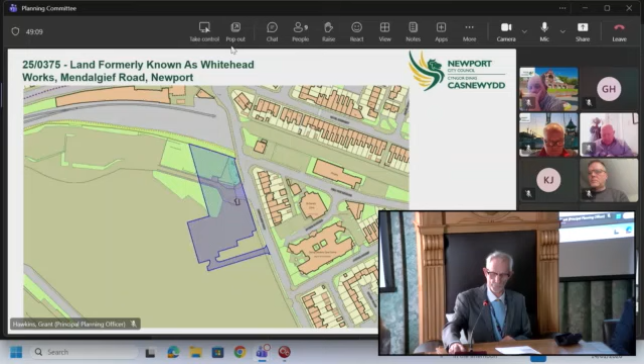On to the agenda. Now before us, application number 25/0375. The site is the land formerly known as Whitehead Works, Mendalgief Road in Newport. The presenting officer for this will be Grant Hawkins, the Principal Planning Officer. We also have no public speakers. Thank you, Grant. Thank you, Chair.

This planning application seeks permission for a 66-bedroom care home, use class C2, including access arrangements, parking, landscaping and ancillary buildings on land formerly known as the Whitehead Works, Mendalgief Road in the Pillgwenlly ward. The proposal is reported to Planning Committee as major development with a floor space exceeding 1,000 square metres.

The applicant has completed the statutory pre-application consultation process. The LPA has undertaken full public consultation through neighbour notification letter, site and press notices, and this has resulted in one objection. An EIA screening has been undertaken, which concluded the development is not EIA development. The recommendation to members is that the application is granted with conditions.

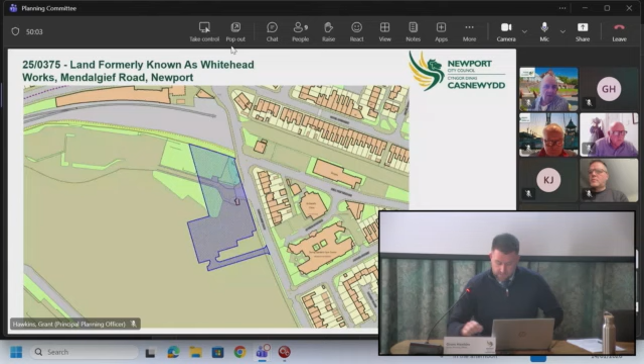The site forms part of the north-east corner of the former Whitehead Works, which is over 17 hectares in size. It is bound by landscape features to the north, adjoins Mendalgief Road to the east, Walker Point Way to the south, and residential properties to the west.

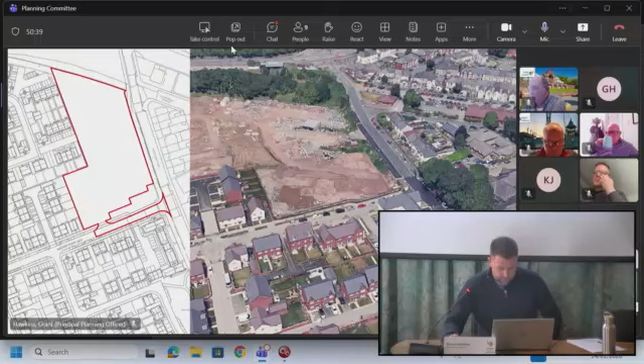The site is set down from Mendalgief Road and is generally flat and level. The immediate context is predominantly residential, although the site is within close proximity to a mix of other uses, including Belle Vue Park and the Royal Gwent Hospital. The site is located within the urban boundary and is partially located within Flood Zone 2 and 3C, as defined in the flood maps for planning Wales.

The former industrial site is allocated for housing under Policy H1 of the Local Development Plan. An outline planning permission was granted in 2018 for a mixed-use development of up to 529 residential units and 24 assisted living units, with a variation of that permission approved in 2020. Reserved matters approval have since been granted for the full residential element, comprising a mix of houses and flats, and the development is now largely complete.

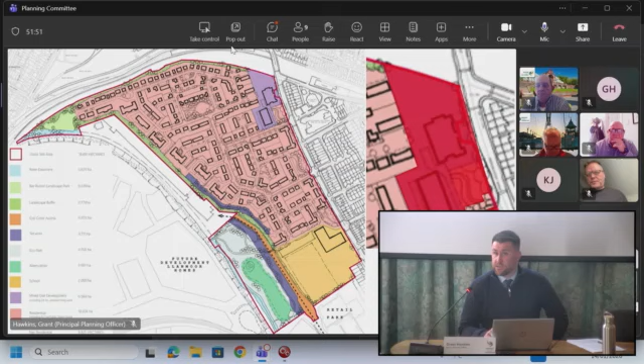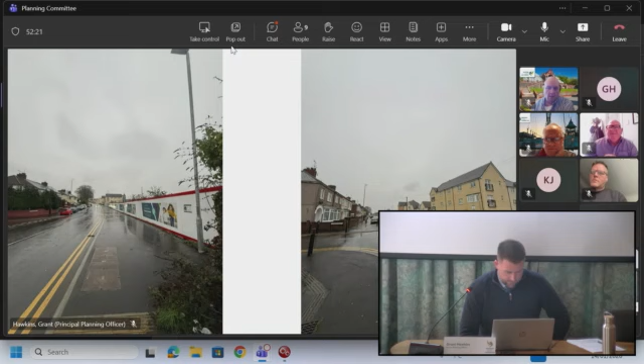The first photograph on the left is taken south of the development site and is useful to provide the context of the local area and how buildings of a taller scale along Mendalgief Road already exist. The flatted buildings are of a comparable height to the care home building that is being proposed. The second photograph again shows the relationship between the three-storey flatted building and Mendalgief Road, with the application site and Royal Gwent Hospital to the north in the background.

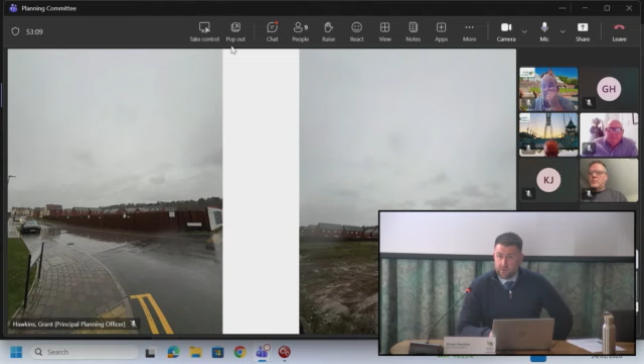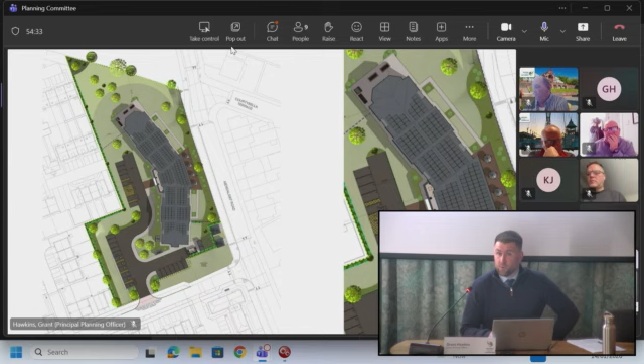As the site is located within the urban boundary and proposes reuse of previously developed land in a sustainable location, and the proposed use is considered appropriate within the surrounding context, the principle of development is considered acceptable, subject to all other material planning considerations being suitably addressed.

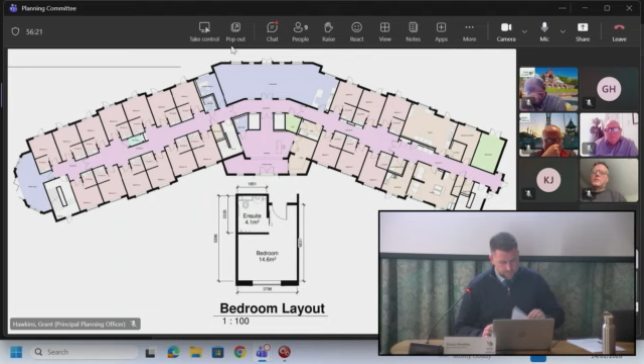The overall layout of the building, bedroom design, access to communal facilities and external amenity areas have been assessed and are considered to provide residents with a satisfactory level of amenity in accordance with Policy GP2. Moving to the elevations, the proposed building measures approximately 77 metres wide by a depth of 17.5 metres, and the height ranges between 11.7 metres and 12.8 metres.

The building design has been negotiated, and the final scheme includes a stepped pitch roof as opposed to the originally proposed flat roof design, which was not supported. Stepping the roof height provides rhythm and void and creates visual relief to the overall building and a variation in interest across the elevation. This gives the building a distinctive appearance and is considered to contribute positively to the character and appearance of the streetscape.

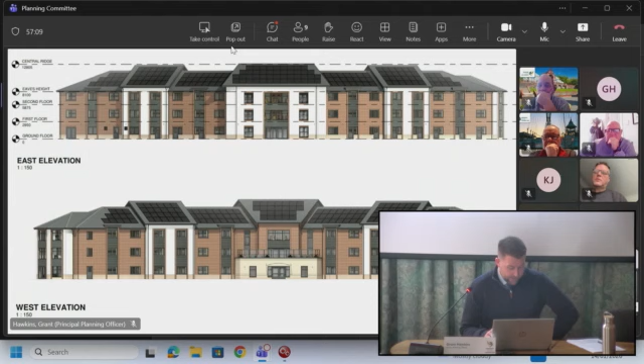The stepped roof line, along with the roof hips at the ends, helps to reduce the scale of the building and manage its overall mass. The overall height of the proposed building is 40 centimetres taller than the three-storey flats that have been granted and built along Mendalgief Road, as shown on the earlier site photos.

However, it is noted that the site is set down from the highway, and a cross-section later in the presentation will demonstrate that.

A mix of brick and render finish is proposed, which are traditional materials that reflect the local vernacular. Fenestration will comprise anthracite grey windows and doors, and architectural detailing includes brick sills and headers and window surrounds, proposed to create visual interest, with the use of horizontal cladding also introduced between openings to break up the massing of the facades.

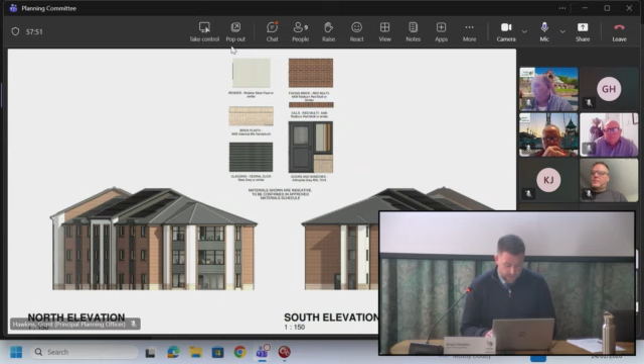The applicant has delivered a care home of a similar design elsewhere, and this slide and the next provide photographs of a real-life example of a closely comparable building, hopefully useful to help you envisage what the building will look like in reality. You will note that comparable stepped roof form and articulated facades are proposed, which help to break up the overall massing, along with the varied use of materials and window detailing to add interest and relief.

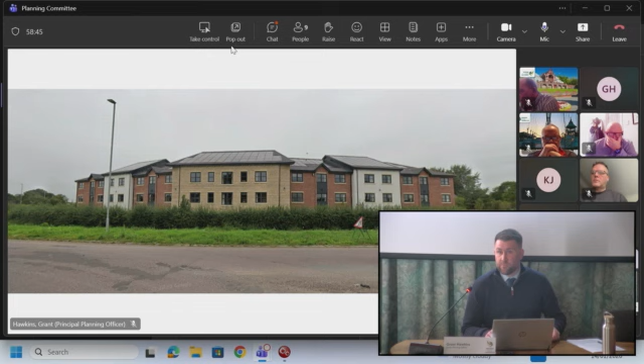Overall, the proposal is considered to be well designed, with a strong quality of appearance and robust materials chosen. It meets place-making objectives and would make a positive contribution to the local character and visual amenity of the area, and as such is compliant with policy GP2 and GP6 of the plan.

The proposal has demonstrated that the amenity of future occupiers would be acceptable. It is also necessary, in accordance with policy GP2, to ensure that there is no significant adverse impact on the amenity of neighbouring residential properties.

To the east, properties at 138 to 154 Mendalgief Road are located approximately 30 metres from the proposed building. This exceeds the minimum separation distances, and as a result, there will be no unacceptable overlooking, overbearing impact, loss of light or sunlight between the site and the properties.

A similar relationship also applies to the flats at Elm Tree House to the south and properties at Walker Point Close to the southwest, where separation distances are greater.

These side elevations contain either no windows or a first floor bathroom window, and there is no direct relationship with protected habitable rooms. Separation distances to rear gardens are acceptable, and no harmful impact in terms of privacy, outlook or sunlight have been identified. The officer report has outlined this assessment in greater detail.

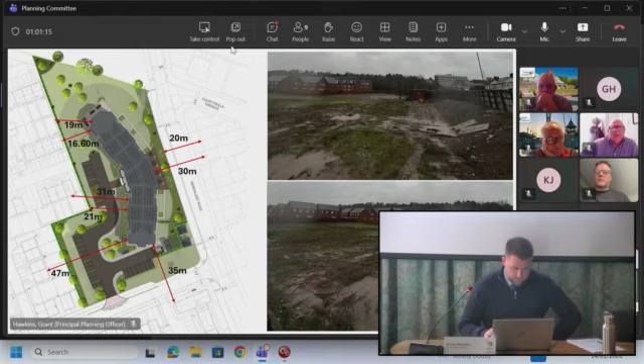Moving to highway safety and parking. As previously mentioned, 25 car parking spaces, which include disabled spaces and electric vehicle charging spaces, are to be provided on site.

Parking has been raised in the sole neighbour objection that has been received, with concerns that the development will increase parking within local streets within the area. The adopted parking standards require 1 space per 3 non-resident staff and 1 space per 4 bedrooms for visitors. With there being up to 25 members of staff on shift at any one time and 66 bedrooms, this would equate to 24.5 spaces.

The application has been supported by a transport statement that considers the sustainable transport hierarchy for planning has been considered, and that parking provision has also been based on the applicant's operations elsewhere and also technical data available. The 25 spaces provided meets the Council's adopted guidance and has been accepted by the Council's Highways Officer.

No issues have been raised in relation to the site access, which has been commented that there is good visibility noted.

Final details of cycle and refuse storage will need to be controlled by planning condition, along with a construction environment management plan and implementation of parking on site prior to the first use of the building.

The Highways Officer has raised the point regarding mobility scooter charging provision. However, this is not a matter that can be controlled through the planning regime, as there is no policy control over it. However, in response, the applicant has confirmed and clarified that there is adequate space for the parking and charging of mobility scooters within the building's lobby, and space has been provided for this.

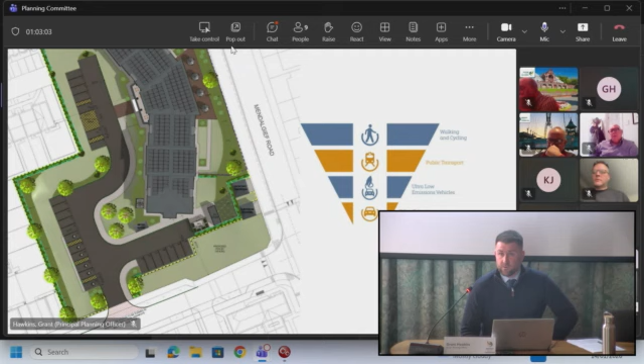Chapter 6 of Planning Policy Wales states that planning authorities must seek to maintain and enhance biodiversity in the exercise of their functions, and that proposals will need to incorporate green infrastructure and, through the stepwise approach, demonstrate a scheme of enhancements to ensure net benefit for biodiversity.

The application has been supported by a number of reports in relation to ecology, biodiversity and protected species. The preliminary ecological appraisal acknowledges the existing condition of the site as being a former industrial use and concludes the development is unlikely to result in any impact on identified ecological features.

In terms of the stepwise approach, to the north of the site, other than one tree identified in surveys as being in ill health, the existing green corridor is to remain unimpacted by the development. Submission of a tree protection plan, along with details of tree protection fencing, is to be controlled by planning condition to ensure that this is protected.

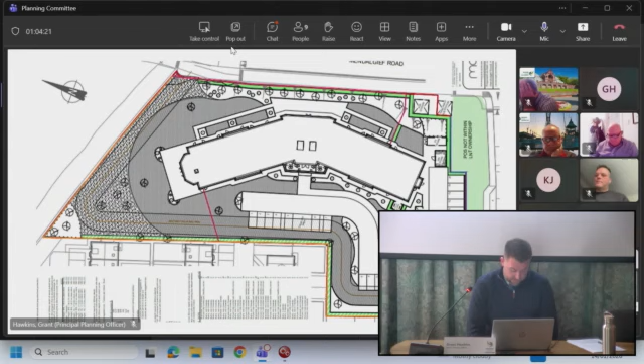A proposed landscape scheme has been developed over the course of the application, and whilst the landscape officer still has some concerns, these are not considered to be fundamental to the layout of the site, but more an issue of detail and specifications that can be controlled through a planning condition for a final scheme of landscaping for the development.

A scheme of soft landscaping and measures including bird and bat boxes, also to be controlled by condition, have been considered by the Council's ecologist as being proportionate enhancement measures for the site.

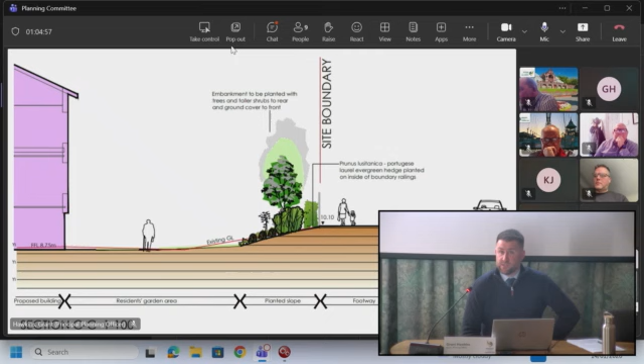No bats were observed emerging from the building, and as such, roosting bats are considered likely absent, and a licence is not required. The survey has, however, recommended that a bat method statement is established as a precautionary measure to protect the European protected species, and this is controlled within the conditional regime.

Green infrastructure, biodiversity and ecology, and the provision of soft landscaping at the site is all acceptable subject to the conditional regime, and the proposal complies with Policy SP1, GP5 and Planning Policy Wales Edition 12.

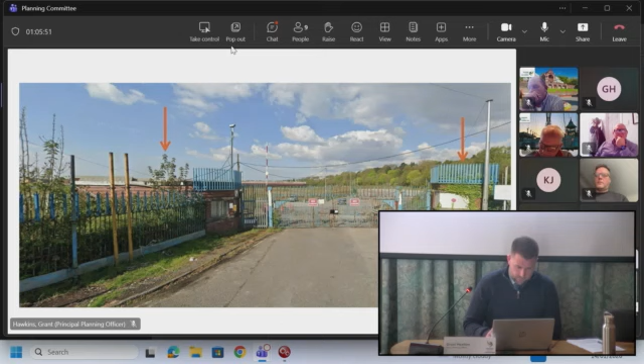Turning to flood risk, the site is located partially within flood zones 2 and flood zone 3, at risk of flooding by sea, as per the flood maps for planning. The eastern area of the site is not in a flood risk zone.

The redevelopment of the site assists with the development plan strategy to regenerate an existing settlement by bringing a previously developed vacant site within the settlement boundary back into a sustainable use. As such, the proposal is considered to be justified in this location.

In terms of the technical assessment, a flood consequences assessment has been submitted, and this has demonstrated that the proposal has complied with the technical criteria and tolerable limits as set out within TAN 15, as outlined and assessed in full within the officer's report.

Natural Resources Wales has confirmed they have no objection to the proposal in terms of flood risk and advised that they are satisfied that the risks and consequences of flooding can be managed to an acceptable level.

A planning condition requires submission and compliance with final site and finished floor levels of the building to ensure consistency with the flood consequence assessment. There were no concerns with the proposed levels shown on plans. As such, the proposal is compliant with policy SP3 and TAN 15.

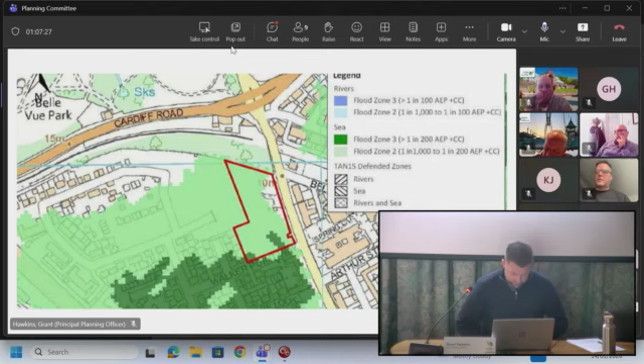Dŵr Cymru Welsh Water initially objected to the application due to existing utilities crossing the site and potential impacts from the proposed siting of the building. The applicant carried out on-site investigations, including GPS-located trial pits, confirming that the building outlines are outside the protection zones. Following reconsultation, Welsh Water withdrew the objection, confirming that the proposal will have no adverse impact on their infrastructure.

Welsh Water do advise that the local water network currently lacks capacity to serve the development without affecting existing customers. They have requested that a hydraulic modelling assessment, to identify any necessary reinforcement works, is submitted. This must be completed before connection, with works implemented prior to the first use of the building.

It is recommended that this hydraulic modelling assessment, with details of required reinforcement works if necessary, is controlled and secured via planning condition. The applicant is aware of this condition and is currently liaising with Welsh Water on this matter. The hydraulic modelling assessment has been actioned, and it's over to Welsh Water to undertake this works in line with their schedule of works for the area.

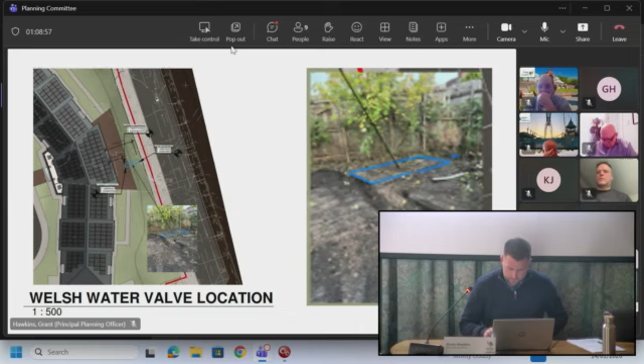In terms of final matters, with regards to the council's heritage officer, they are satisfied that there is no adverse heritage impact in terms of Belle Vue Park, which is a conservation area to the north of Cardiff Road. And the council's senior scientific officer has raised no air quality concerns and has recommended conditions in relation to land contamination.

Overall, as outlined in full within the officer's report and summarised within the presentation today, it is considered that the proposal complies with the relevant local and national plan policy and is considered to be acceptable. It is therefore recommended that the application is granted subject to the conditional regime put forward within the officer's report. Thank you.

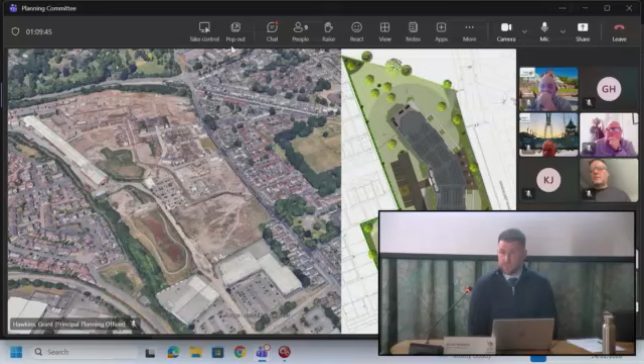Yeah, thanks, Jay. Just on the one point there with the parking for staff and residents - you said it's within parking zone 4, with one space per 3 non-resident staff and one space per 4 bed for visitors. It just says 25 spaces. I've worked that out to be roughly 32 spaces, or maybe more, because if you put in one space per 4 bed for visitors, you'd want 12 spaces for visitors, plus 25 for staff. So how can we have just 25 spaces on site? How does that ratio work out?

Okay, so I checked the calculations, and they were checked by the council's highways officer, who confirmed he was happy that it was compliant with council standards. I haven't done the quick maths off the top of my head to confirm that now, but both parties have checked it. Notwithstanding that, the applicant has also provided TRICS data - technical parking data from comparable sites of care home use of a comparable size and location - to support the level of parking and traffic movements in and around the area as part of the transport statement.

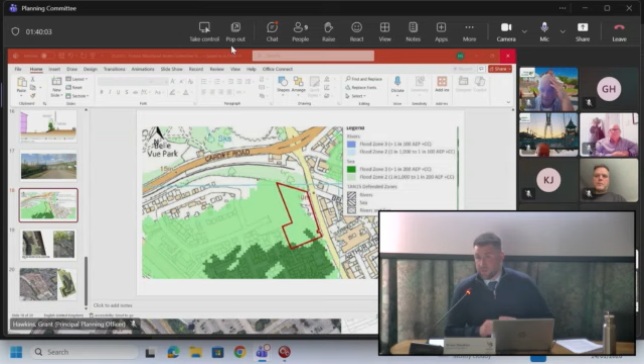In terms of the evacuation plan, that's not something planning would look to control. That would be the responsibility of the user, as the care home provider of the site. As part of our test, we don't look at whether there is an evacuation plan, although the FRA does recommend there will be one.

What you can see, now that I've stopped sharing my screen, is that the site is very close to the edge of the flood risk zone. Mendalgief Road, which is at a slightly higher level, is outside the flood risk zone, as is Cardiff Road to the north. So there are clearly areas within close proximity of the site that wouldn't flood, and given the nature of the flooding, there would be advance warning that a flood event might take place.

In terms of the ground floor residents, this is something we've looked at. In flood zones 2 and 3, generally speaking, self-contained accommodation at ground floor is not supported, because if someone's in a flat or residential unit at ground floor in a flood risk zone and it floods, they may not have the opportunity to seek refuge at higher ground.

In this instance, the whole use is communal overall, and residents, with the support of workers, would have plenty of communal areas at first and second floor that would be flood-free in the event of a predicted flood. So if it was chosen not to evacuate the site, there would be a fallback position where residents could be supported to go to the first floor or above, which would be flood-free. On balance, considering the overall benefit of the scheme and the care it provides, we're satisfied that it is acceptable and can be managed to an acceptable level, as confirmed by NRW.